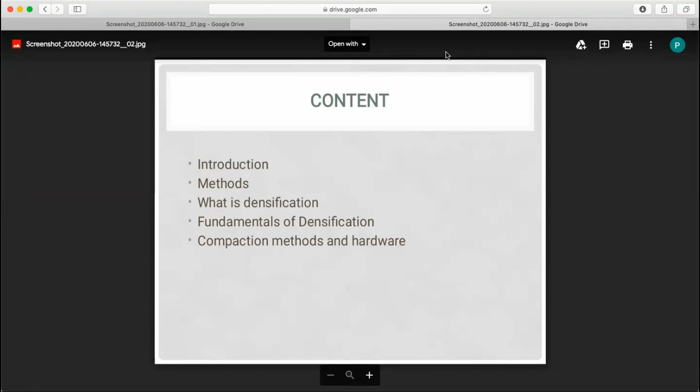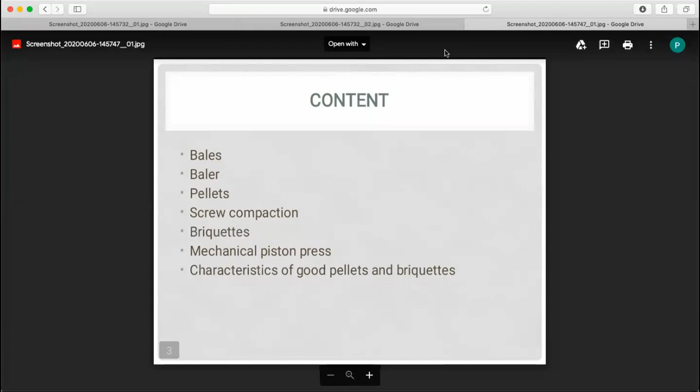Then bales, baler, pellets, screw compaction, briquettes, mechanical piston press, characteristics of good pellets and briquettes. Let's move to the next slide. First we're talking about the introduction. It is renewable energy, with lower energy content than traditional fossil fuels. When lower energy content is combined with low density, the volume of biomass handled increases enormously.

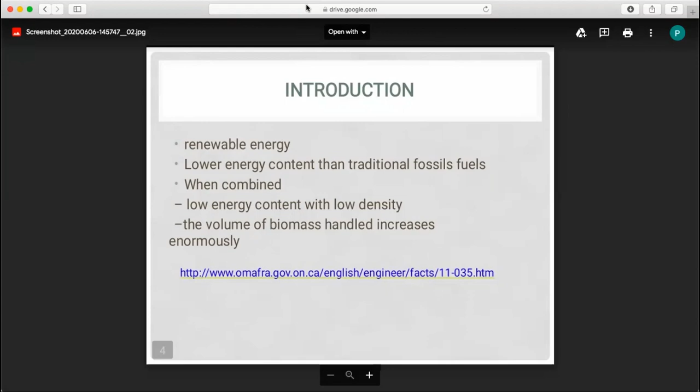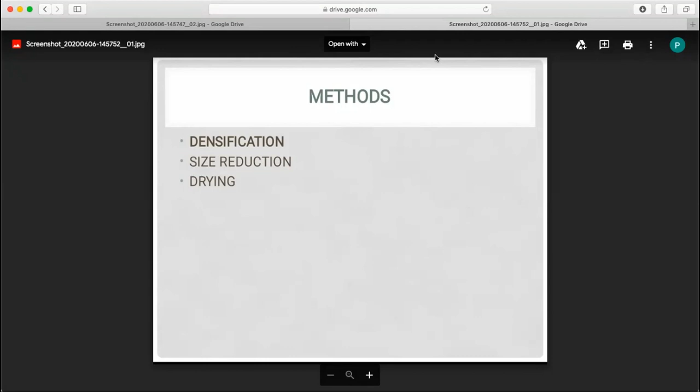Methods. There are three methods of biomass preparation for harnessing. First one is densification, second one is size reduction, third one is drying. In this PPT, we are talking only about densification. What is densification? Densification is the process of increasing the density of something. It is also known as compaction, and it is compacting low density material into a product of high

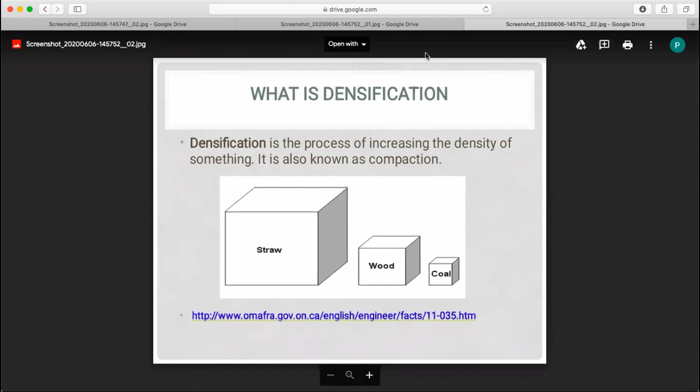density. In this picture, a common volume ratio for unprocessed material gives the volume of material required for equal energy: 16 to 4 to 1 for straw to wood to coal. Then the fundamentals of densification. First, it reduces storage space and transportation cost. Potential advantage for energy and feedstocks. Applications of densified waste biomass are evident. The heating value is 15 to 17 megajoules per kg. Pellets, briquettes, logs, and baled straw.

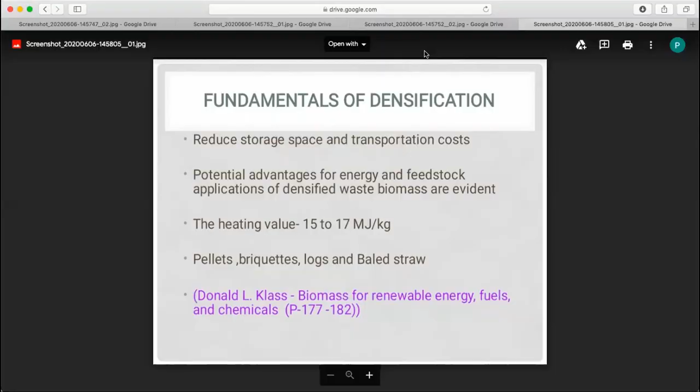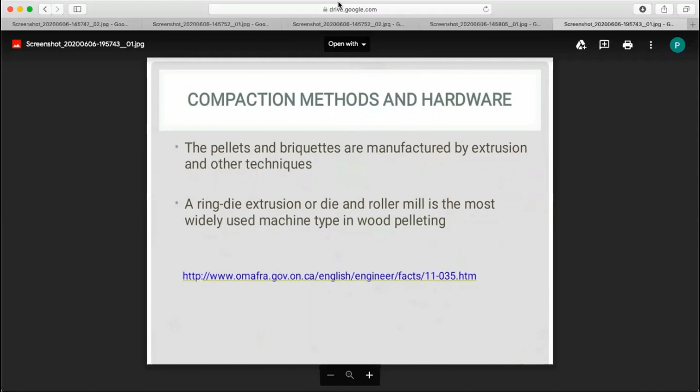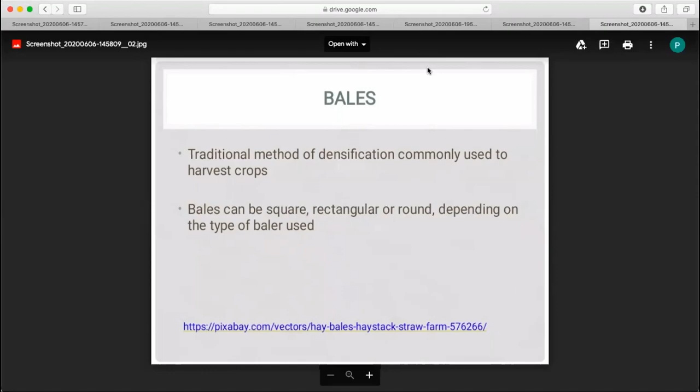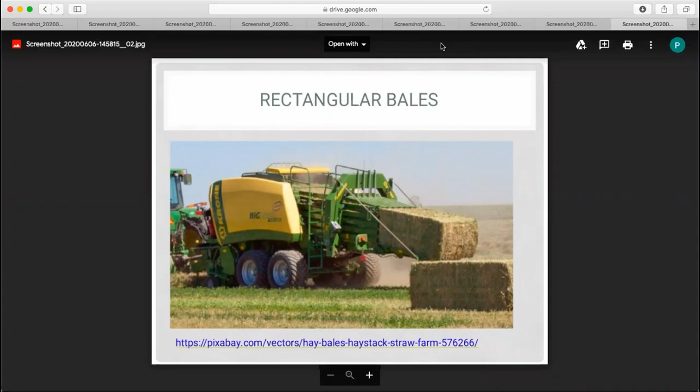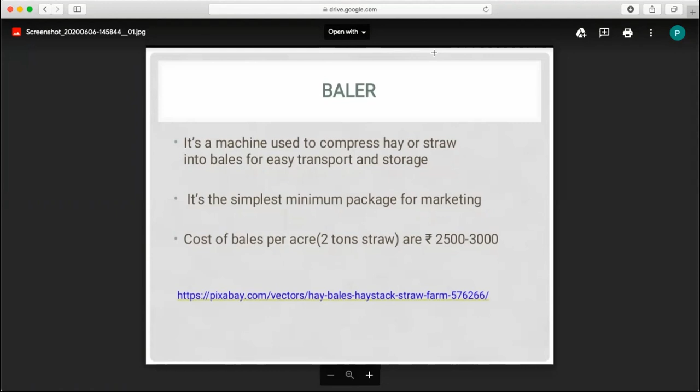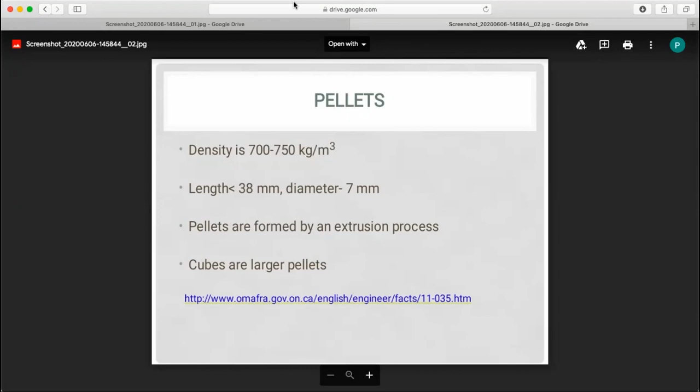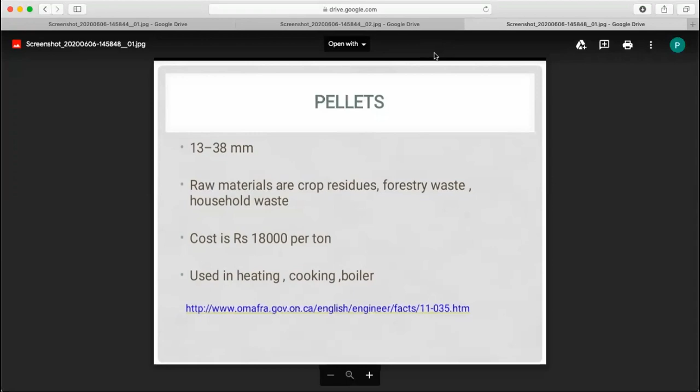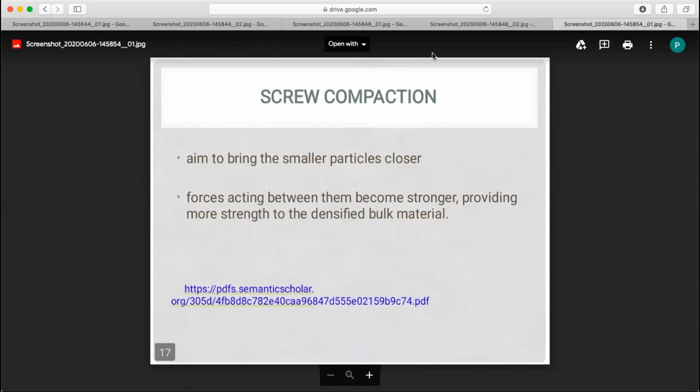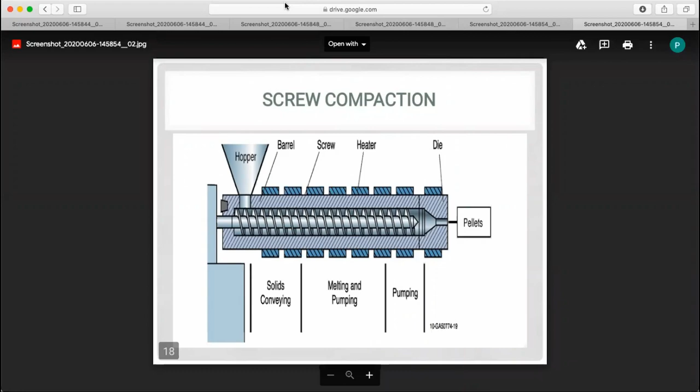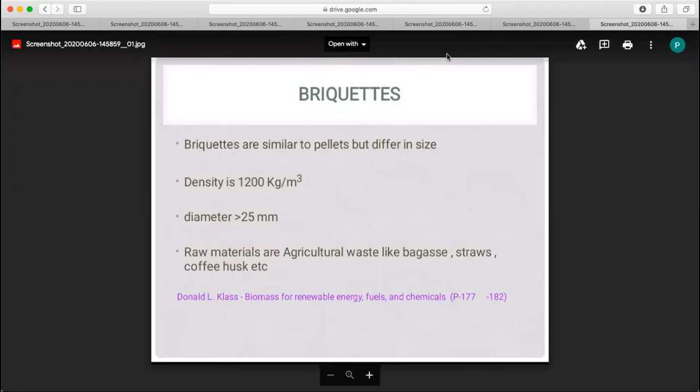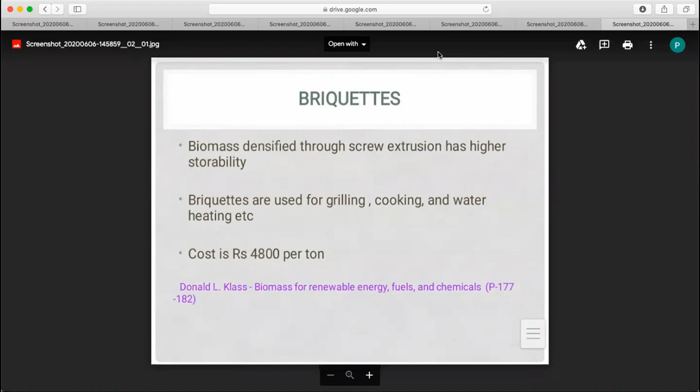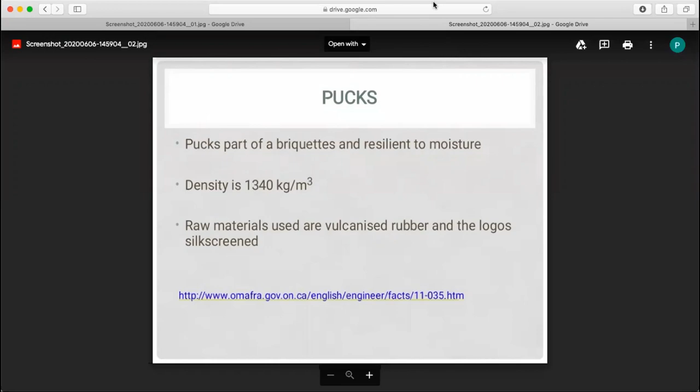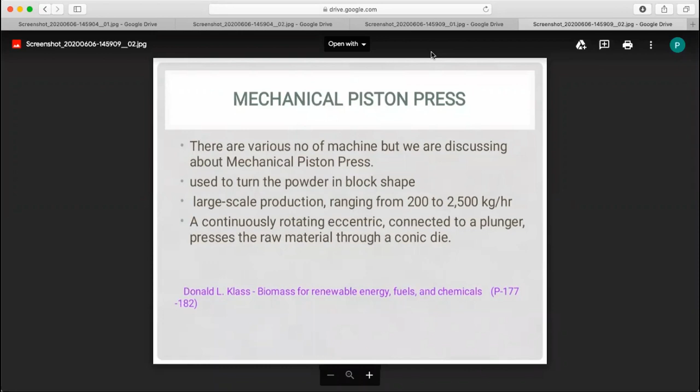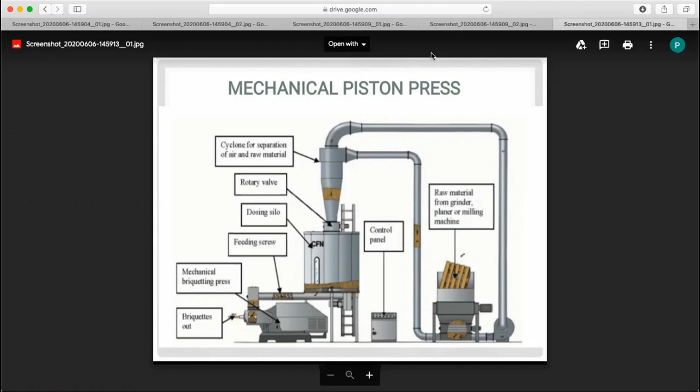The characteristics of good pellets and briquettes. Pellets: the color should be woody. Briquettes: moisture content is around 10 to 18%. Pellets: the specific weight has to be approx 0.65 kg per liter, and for briquettes airflow is good. The wood pellets have to be without additives. Briquette strength increases with increasing compaction pressure. Pellets: the water content is between 5 to 10%. Then the briquettes ash removal.

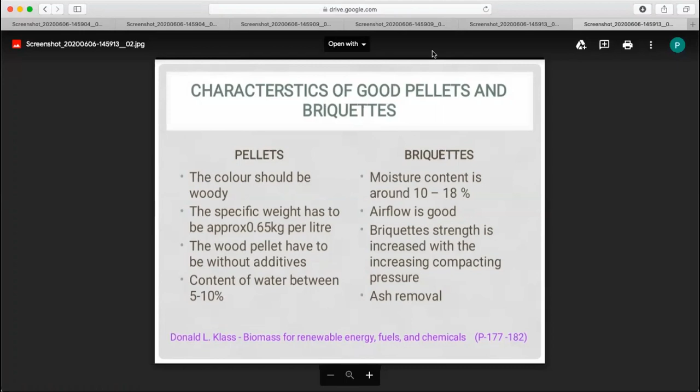These are some sources of the presentation.